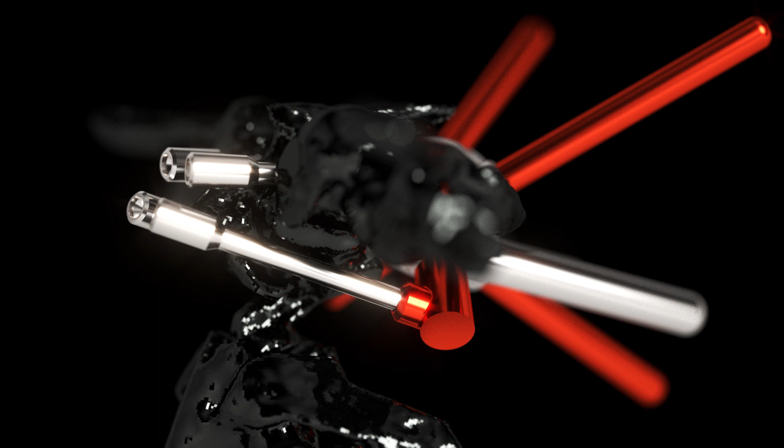Welcome to video number 4 of our GUNPLA series, where I'm going to continue doing this hard surface model for my robot. So in the last video, we created this backpack with a bunch of boosters.

The thing is that right now it's completely disconnected from the robot itself, as you can see, I can just freely move it away. And I need some sort of mechanism on how to actually connect this backpack to the robot here. I'm thinking about how to do it.

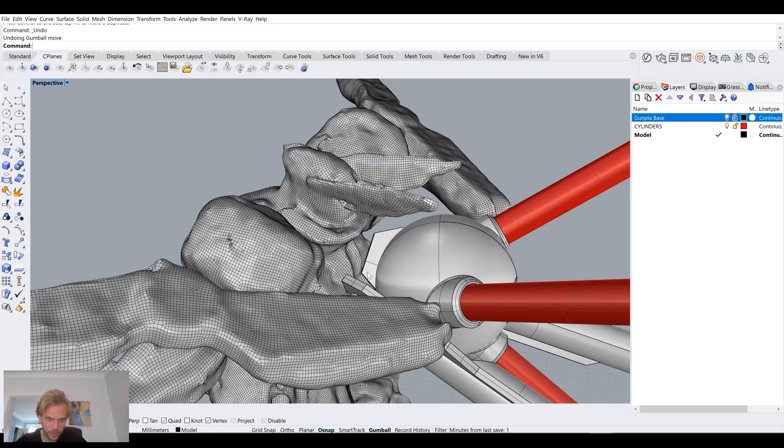One way would be to create these kind of straps of plastic that would wrap around here and then go back and here as well. So these two clips of plastic, but that really relies on tolerances being tight, and as you can see here, the tolerances are not tight, and also it's a little bit conventional.

So I'm thinking of continuing on with this kind of tube aesthetic and creating these sticking out tubes, like 4 spikes that are sticking out, 2 in the top part and 2 here in the back part, and then somehow figuring out how to connect it all. We'll see. But for now, let me hide the robot.

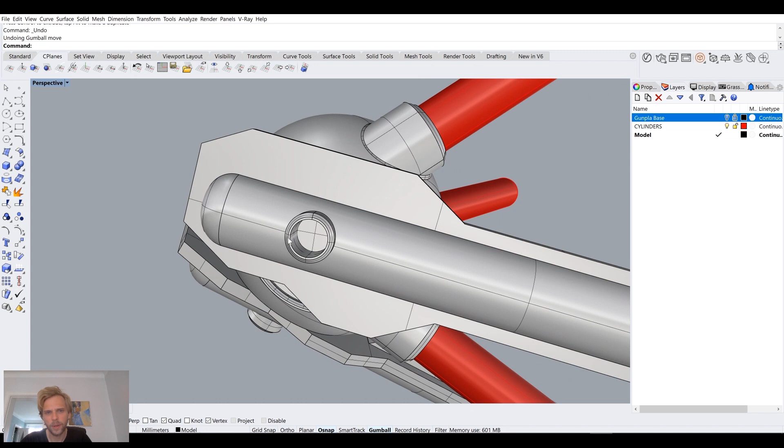For now, I want to fix this, because I don't like how this portion looks like. Everything else here, I thought about it, and it seems to be kind of okay, except this tube here. So to fix it, I will just simply duplicate edge.

I'll duplicate this edge, and I'll go for extrude. I will extrude curve, and I'll just extrude this edge until here. And then so now I have basically just a cylinder there.

I kind of want to keep this portion, this one I like, so I'll extract surface, and I'll just extract this ring here, which means that this whole part gets disconnected from the initial poly surface, so I can just join them up.

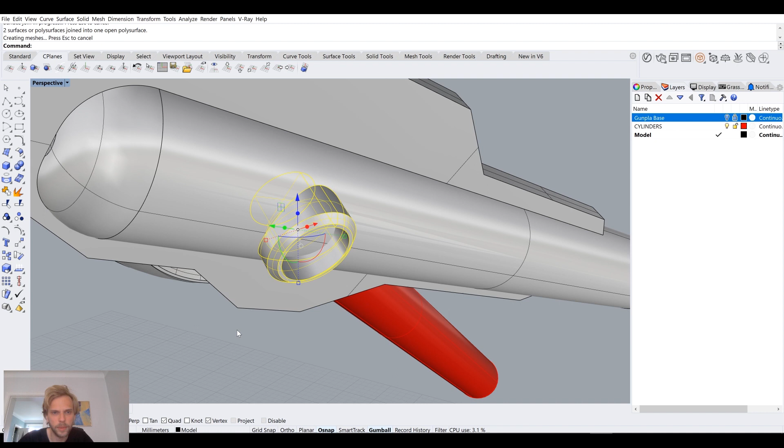Let me hide this for a bit. I also want that part right there, so I'll use extract surface, extract that one, which means that all of these, 1, 2, 3, 4 other surfaces get disconnected from the initial poly surface, and I just join them up into one polysurface.

So now I have this shape that I don't really need. I have this one, and I have this one, okay that's good. I will also extract surface, and I will just extract these two guys here. So now let's get rid of this, I just select it and delete it, and as you can see, some parts were left here.

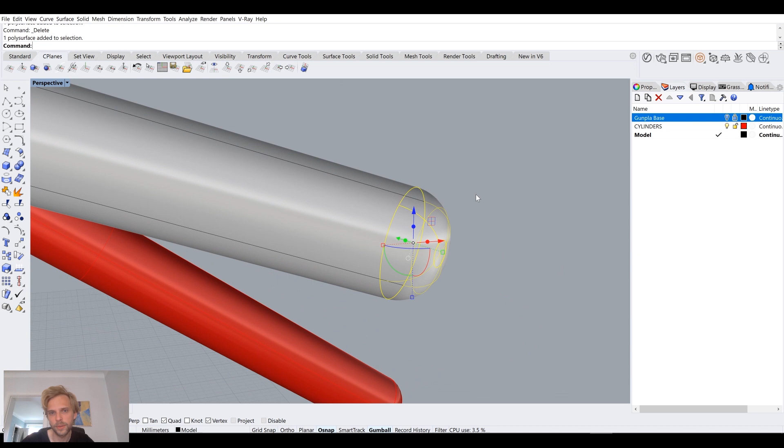So now, the first thing that I want to do is I want to mirror this to the other side, to here, I think. Or should we cut it instead? Yeah, maybe we can cut it rather than mirror it. We'll see. So for now, I'm just going to leave it as it is.

I'm just going to join it, without joining this or this, without joining these two, I'm just joining this one, and we'll just cap to close it off. So now, if I show selected, and actually let me get rid of these tubes here.

Oh, those are in the same layer, super. You can see there is an intersection going on because we need this portion to be flush cut. We need it to be cut flush.

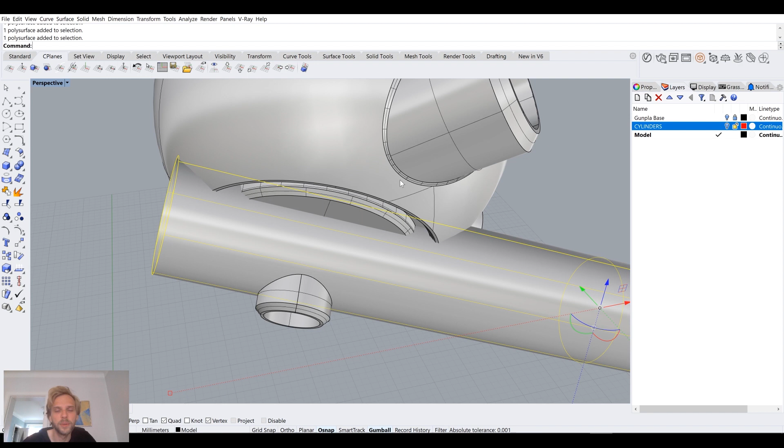And to do that, I already have a curve here, like that. So what I'm going to do is, holding down the Shift key with the gumball, I'll increase the size of the curve to something like this, maybe smaller, something like that. So when you hold down the Shift key, it scales everything up automatically. So we have it like that, maybe even smaller.

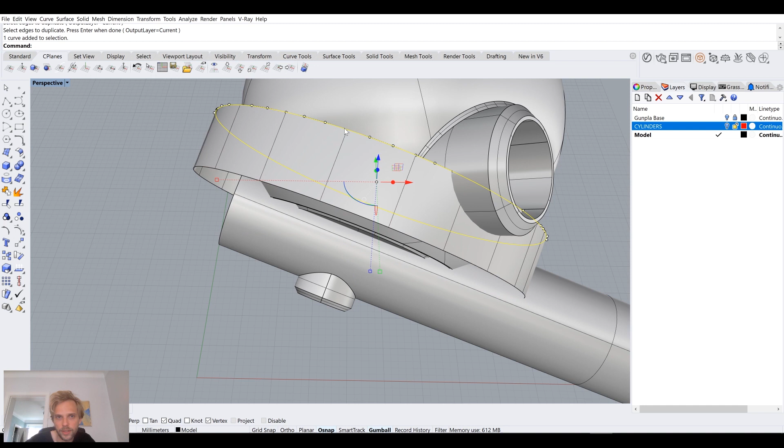Yeah, looks about right. And I will extrude this curve so that it extrudes perpendicular, in a perpendicular direction, like so. And maybe we will want this to be at a cool angle, so I will just duplicate edge to get the closer ring here. We had this edge as an original, and now I've just extruded and duplicated edge to get this curve right here. So let me delete the ring.

And if I were to increase, holding down the Shift key again, the size of this guy here, and then loft them, like that, then select the ring and cap it, we will have a cutter that should work quite well. Let's try. So I will select this guy, Boolean difference with this one.

Looks about right. Okay, good. So we have that going on. Let me hide the sphere for a bit. And let's see how we can connect these back to the shape, because right now they're disconnected. So this one is going to be easy. I'll just use trim and just trim away the

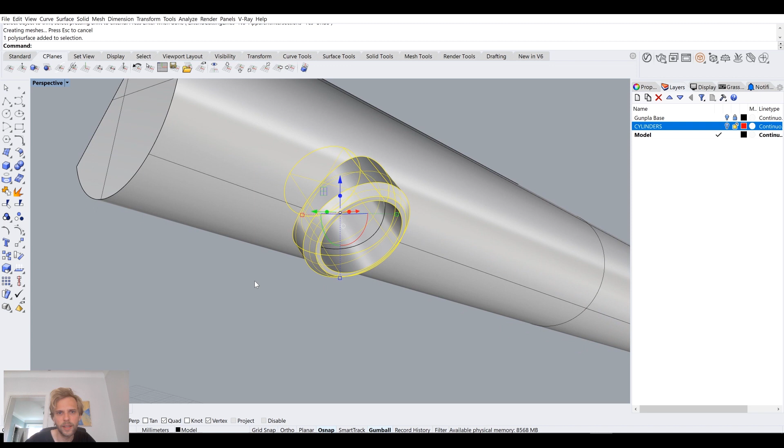We need to use the shaded tool. No. Okay, so I will not do the trim. Instead, let me hide it again. Let's go back to shaded view. I will duplicate edge, like that. For now, I'll just hide it for a bit. And I'll use this edge to trim.

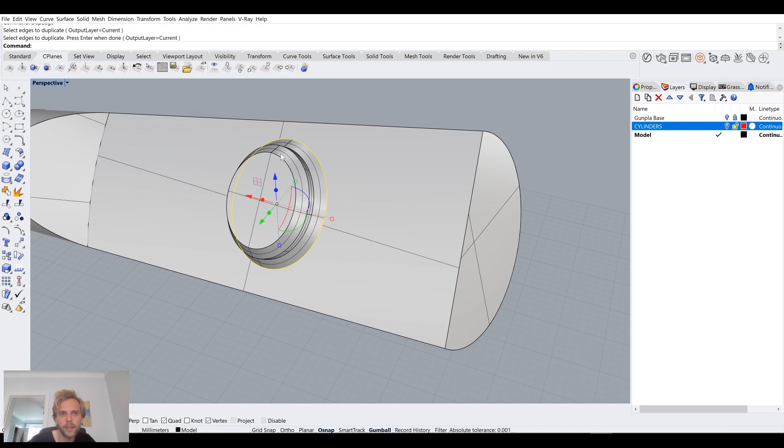Now this should be fine. Like that. And I believe I will do the same thing with this one. I could use Boolean difference, but might as well do the same method. So duplicate edge, hide this one, select the edge, trim. By the way, when Boolean operations don't work, you can always try this method, and not sometimes, most of the time it works much better.

Okay, so now I have this shape here and these two shapes, and I believe if I join them and type in what, valid surface, closed, super, it's a closed solid polysurface, so that's what we want. Okay, so I just cleaned it up a little bit, nothing too fancy, just wanted to have it going in a nice way.

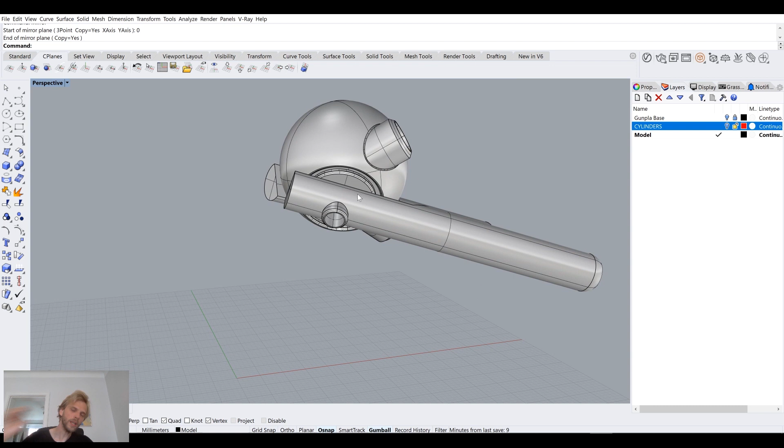Let's show, and I will just mirror it to the other side to see how it looks. Yeah, a bit better. Those fins I wasn't a fan of, and now we can see these rings here. It's nicer. Okay, so we have that going on. Now, what do we do? Now I believe it's time to, well, not connect it, but create some sort of bracing system for this model.

So shall we work with lines? Yeah, let's work with lines. So I will create a straight line. Should we do it in top view? Yeah, perhaps let's do it in top view. Shaded. I will create a straight line like that. The length of it doesn't matter. And I will create a new layer, call it helper and make it blue. There we go. Change object layer, and also I'll make helper the active layer.

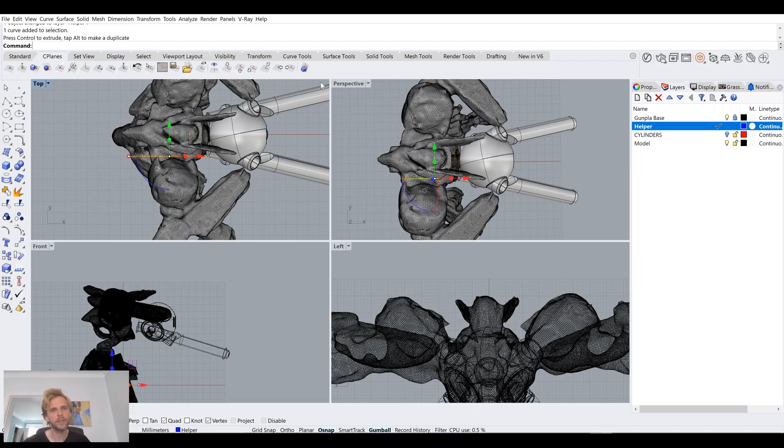Okay, so we have that line going on here, and basically I want the bracing to go above the collarbone, and below the, not the armpits, but how are these called? The rib cage, below here, right? So first I will do the one with the collarbone, the top one.

So in the top view, let's see. Well, it needs to be definitely rotated. A little bit like that, I believe. Seems to be good. And then in front view, I have no idea what kind of angle this is. So hard to tell. So let's do it in perspective instead. Yeah, definitely.

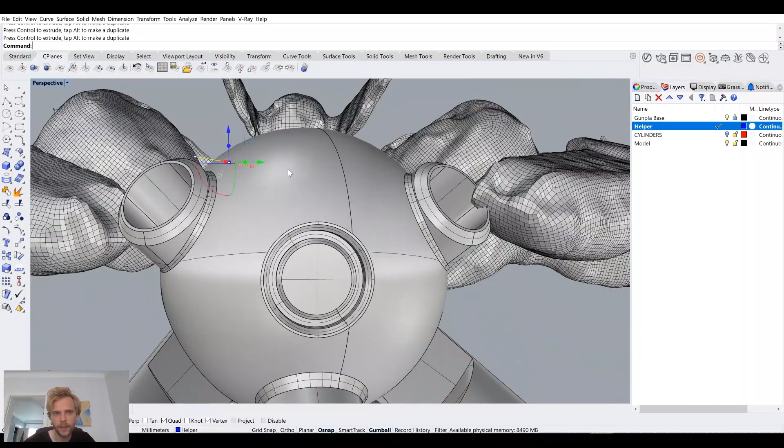Or maybe, sorry, I'm blabbing a bit. I'm just trying to figure out the angle of the line. Maybe just something slightly like that. That should work, right? Okay. Then I will push it in. And this is looking straight at the line. This is the angle that we get. Maybe it can go a bit more like so. Yeah, that seems okay. Okay, so we have one line done.

And I will just increase its size, holding down the Shift key again and dragging on the gumball to have an idea of what's going on. And now for the next one, holding down the Alt key, copy it down, just like that. And now find a good position for it.

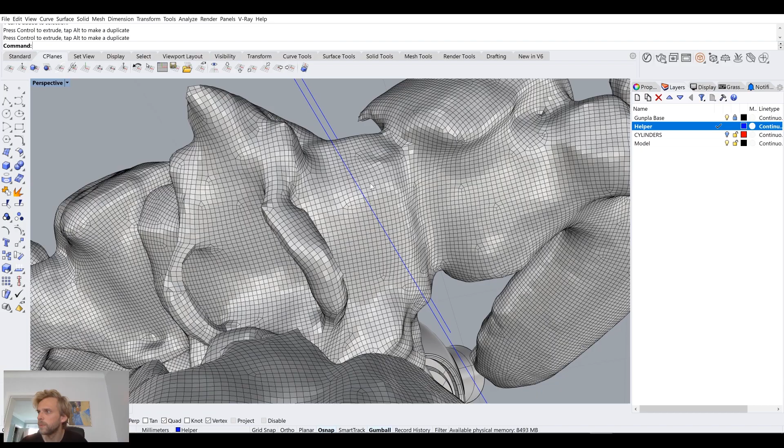So looking at the actual model, this is a single surface, which means we can follow it. Let's go to top view. I'll probably do something like this in the top view, just slightly rotating it. And now this will need to rotate quite a bit. Can we actually see it? Oh yeah, we can. So I want these directions to follow, and they seem to. So that's good.

Not really happy about this angle here. Perhaps we should keep it horizontal. Let's see. No, actually, yeah, that's fine. Yeah, that seems to be okay.

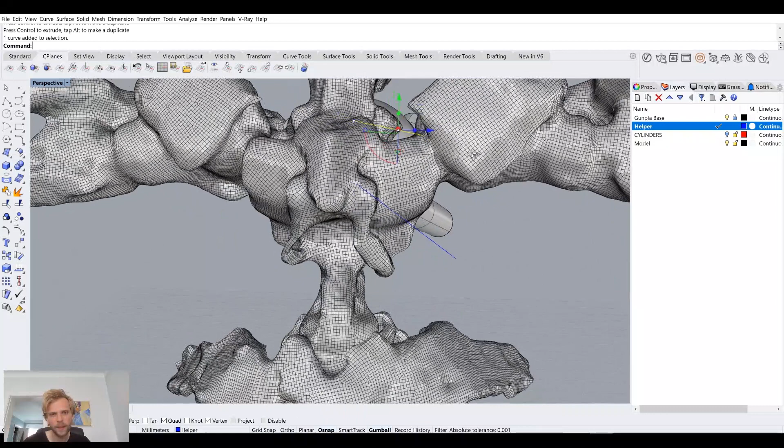Okay, and can this one move a little bit out and a little bit higher? Super. Okay, so we have these two guidelines here, and I will not be working further with them, and I will just scale them up individually to be longer, so that we don't need to deal with it if there's not enough length in the future.

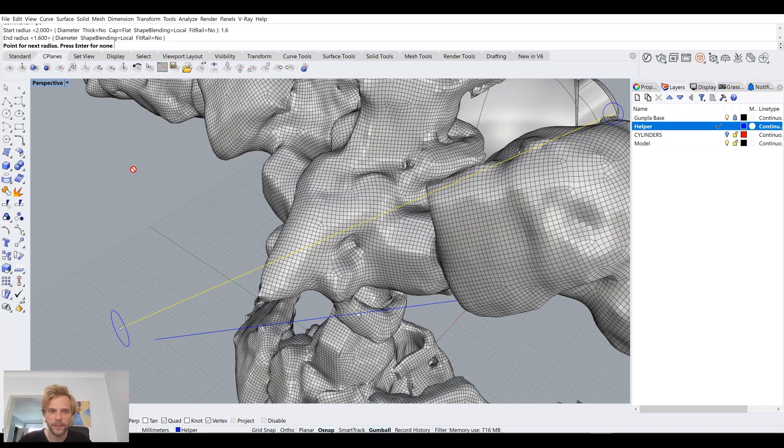And I'll just use pipe on them, and we need to decide what kind of thickness we use. I believe like 2 millimeter radius should be okay, like 4 millimeter diameter. It's a little bit intersecty. Let's try 1.6. Yeah, 1.6 seems to do the trick, so I'll do the same thing here.

So it's actually not 1.6, it's 3.2, because the diameter is 3.2, and if I were to measure the thicknesses of the plates here, that's 1.6. Let's see, 1.5, 3.2. It's a little bit thin, but I think we can manage. Okay, so 3.2 is here.

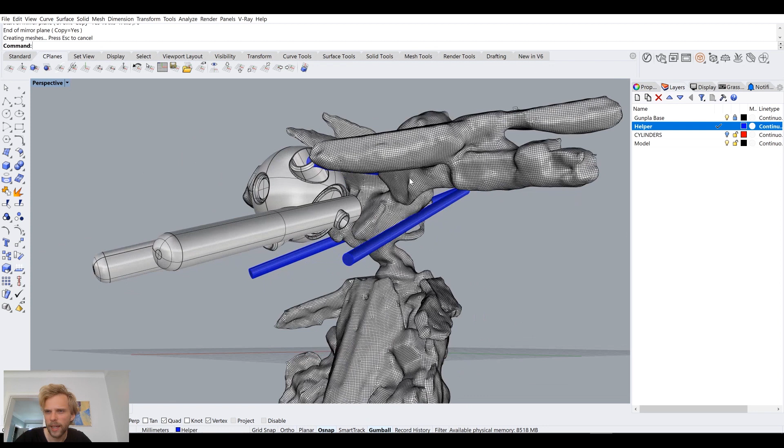Let me quickly mirror it to the other side just to see how it all looks. Doesn't seem too bad. We will be fixing all of the intersecting issues and so on. And now I will lock these blue ones together with the robot, and I will select everything else, and I will position it just slightly lower.

I just want to position it so that these guys fit better, because here I can see there's going to be some intersections and so on, and this is the last time when I actually work with the composition of it. So this can stick out and do that, and this one. Actually, this is pretty good. Yeah, okay. I just slightly moved it down, but nothing else.

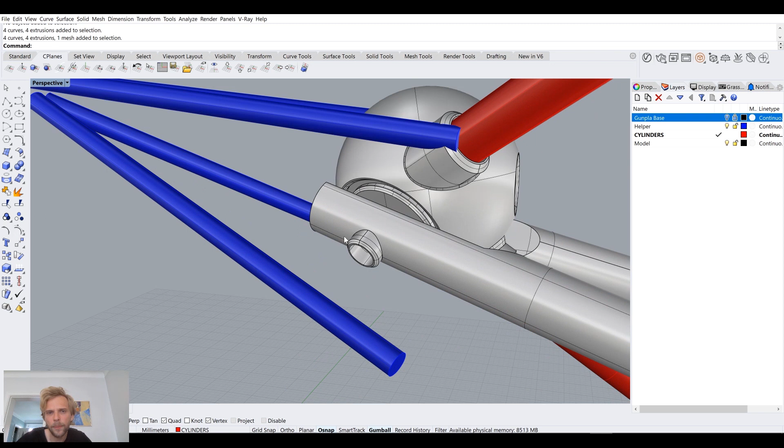All right, so we have these pipes here going on. That's super. And we have the robot. Let me actually hide it for now. And now we need to connect these pipes with the shape here. So actually we already have a connection area here, which we can use. That's superb. And we will need to figure something out here. I don't know. We'll do something with it. Yeah, we'll figure it out. Okay. So for now, let's solve the bottom one.

So for this one, I believe we can duplicate edge. We can get this circle in the base of the hole, and I will offset it inwards by 0.1, so that it can fit. And I will extrude curve, and this is 4 millimeters, I will extrude it slightly out, so let's say 5.5 millimeters.

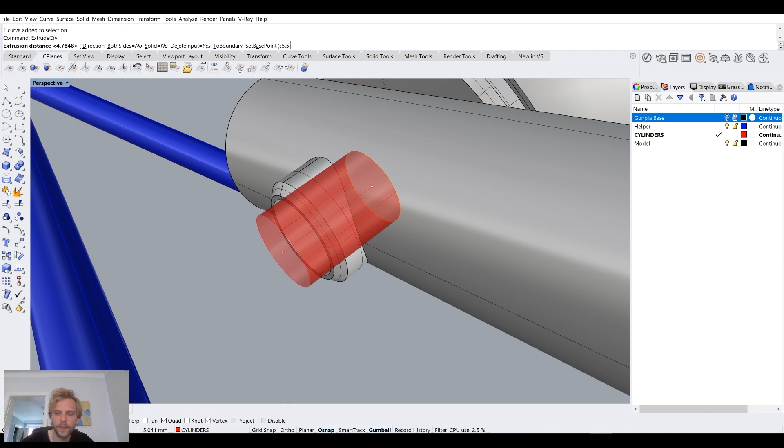Something like that. And then I will duplicate edge, get this edge, offset, and how thick do we want this boy to be? Let's say 3 extra millimeters here. Should it be thicker? Nah, I think that's fine. Between these two curves, the inner one and the outer one, I'll create a planar surface. And for this curve, I will just extrude it. Extrude curve.

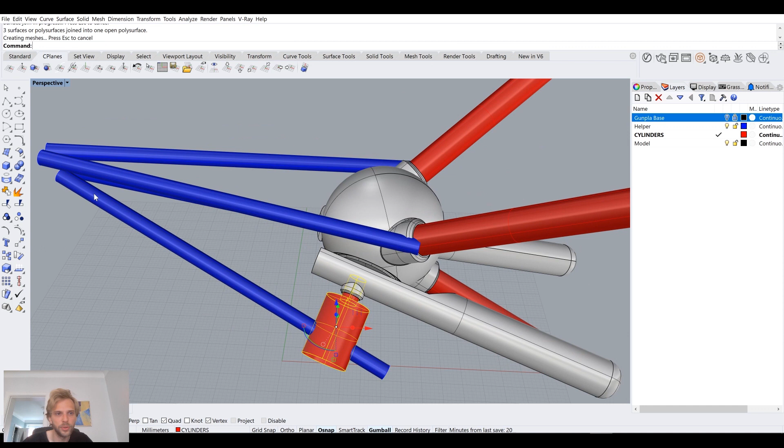And extrude it, let's say 13, I don't know, 13 millimeters. Something like that. Okay, so now we have an intersection going on, which we will need to fix. But at least now we have some form of geometry that can hold this new pipe that we've done. I will just cap it like so.

Okay, so now let's think about this. This tube needs to go in. Okay, I will use extract surface on this base surface here. Or actually, can I not do that? Duplicate edge rather. Yeah, I will use duplicate edge here. And then let me offset the edge outwards by 1.6 millimeters.

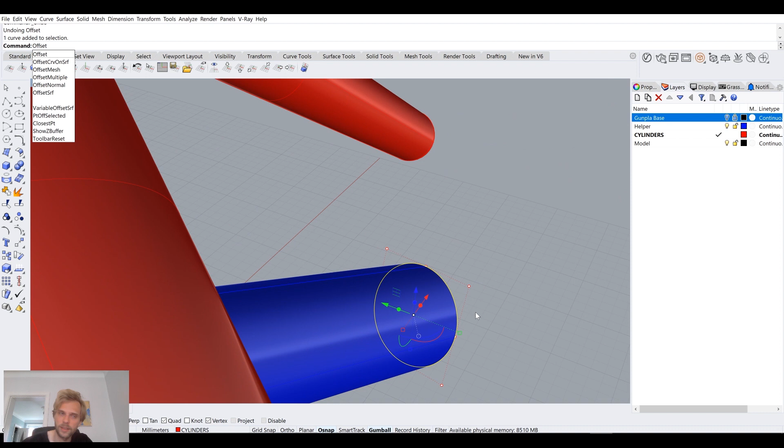Is that really 1.6? Holy crap, that's thick. Distance. Yeah, that's 1.6. Okay, let's try offset, rather just offset 1.2. Yeah, we can deal with 1.2. Okay, so we have this guy going on here.

And let's move everything to somewhat of a correct position. So I'll take these two curves and move them. Let me turn off center snapping for a bit. So I'll move them from here to somewhere. Right now I'm just visually kind of checking it out. Somewhere here maybe. Something like that.

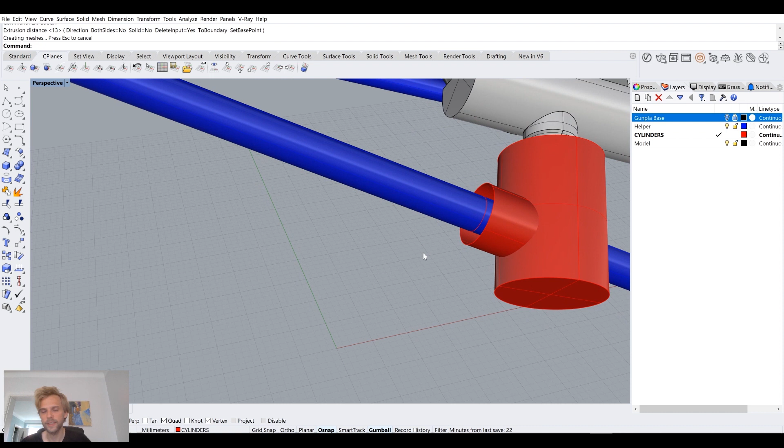That should be fine. And basically this guy is going to be extruded. Extrude SRF, no, sorry, extrude CRV, extrude curve, and this is just going to be an intersection here, like that. So that's easy, and let me cap it, and actually already use Boolean union to kind of join it in. And then this inner curve is going to be used as a hole for this tube. So let's see how we can fix it.

Let me turn off the tubes, and I have this inner hole here, or rather inner circle here. First of all, I need it a little bit wider because it can't be the same width as the tube, because it will not fit because of how 3D printers work. So I will just offset surface, or offset curve. I'll just offset this circle outwards by 0.1, or let's have a snug fit, so 0.05 millimeters.

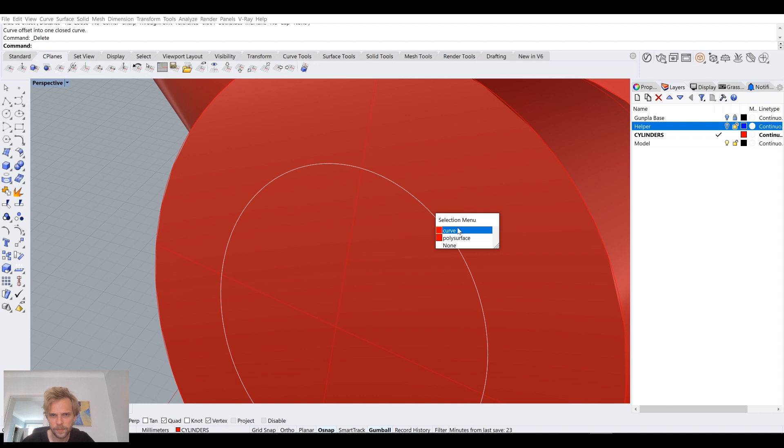Like that, and just extrude CRV and extrude it inwards. I think something like 7.5. Let's do 10. No, 10 is also bad. Let's do 8. Sure. 8 millimeters should be good enough for a fit. And then I'll just cap it. So now I can take my original cylinder and Boolean difference out this inner cylinder here to make a hole. Let me clean everything up a bit. So I'll SelCrv, select curves, and I'll just hit delete to make sure that there are no curves here.

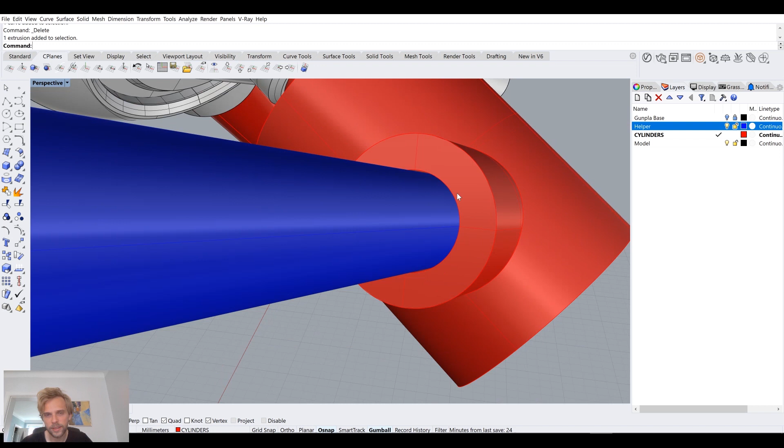Okay, so we have this going on, and I have my helper here. Oh yeah, and of course, this cylinder needs some trimming. Let me turn on wireframe. The only place where the blue cylinder is hitting the red cylinder here is at the back of the hole and also here. So I can do Boolean difference, subtract from this guy, enter, subtract with, and I'll choose delete input to be no. I'll subtract with this cylinder here.

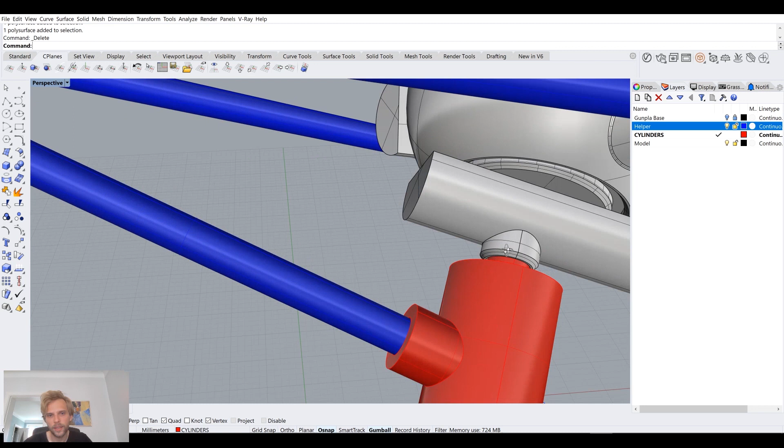And you can see now this blue cylinder got disconnected into two parts, one that fits perfectly inside of the hole and the other is the unnecessary end of it. Okay, so we have this going on. That's great. I'll just quickly do some chamfering, but nothing too much. So for this to fit better, I will chamfer edge. Oh, that's a 1 millimeter chamfer. I'll chamfer edge by 0.3 millimeters here so that it's easier to fit in the cylinder. And actually, let me do it like so, 0.3 there.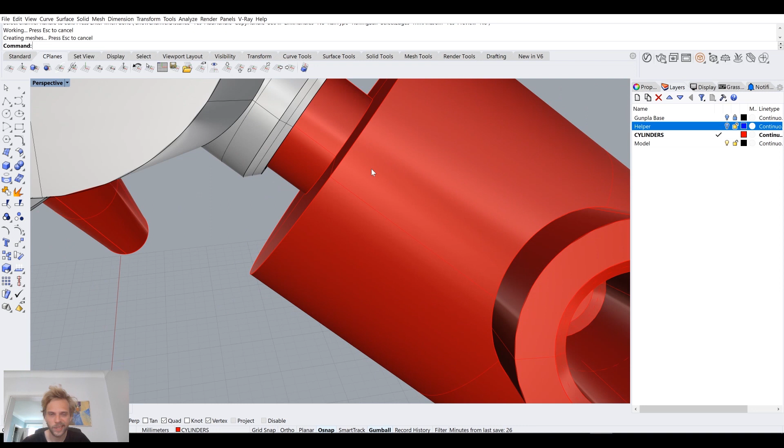But if I chamfer that part, that means that I definitely need to chamfer the edge of the cylinder as well. So we will do that right now. Chamfer edge, so that everything fits perfectly. So now it's chamfered. Okay, good. Back to here. What else? I believe this is a bit meh. So I will chamfer edge, and I'll actually chamfer with 1 millimeter here to have something like this going on. Should this be...

Maybe we can use fillet edge on this one. So fillet edge, rather than making a straight chamfer, is going to round off the connection. So fillet edge, radius 1 millimeter, sure. Let's see how it works with this. Let me put an EMAP on it just to see better. Yeah, that's not bad. Yeah, that's fine. Okay, EMAP close. Okay, so we have that going on, and what else?

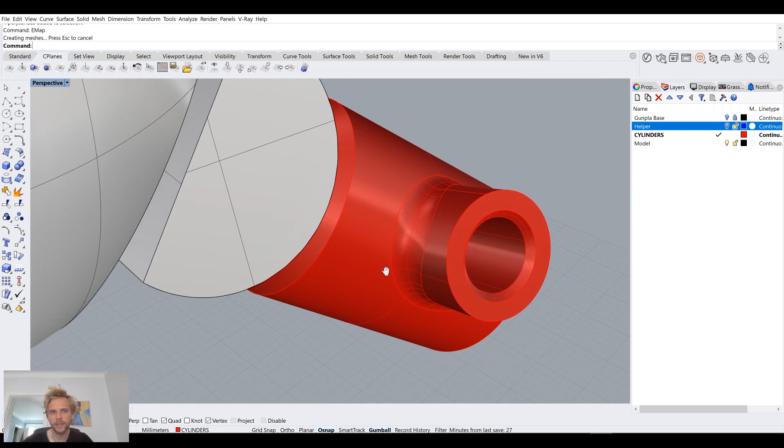I will deal with this part later. We'll make it pretty. Maybe we need to fix this. Okay, so chamfer edge. Let's go for 0.5, like half a millimeter for this one. Looks okay. And this one as well. Yeah, okay. So we'll have it like that. And this one travels to our model layer because it's kind of finished. We don't need that part, and we can just delete that.

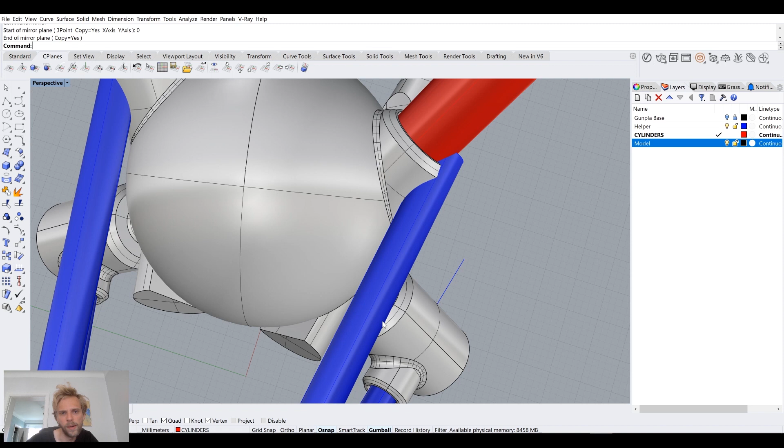We can just take these two guys and the curve and just mirror them around the 0 point, holding down the shift key, to the other side, just like that. Okay, so we have the bottom part done. Now it's time for the top part. And for the top part, let's think about this. Should we still do a cylinder, or can it be like a sphere? A sphere would look weird, right? Yeah, let's just do a cylinder.

Okay, so let me delete that. Don't want that. And let me actually hide that. I only care about the curve now. First of all, I will select a point here. Is there like a tangent snap? No, there's not, of course not. So that will not work, but can we create a point in the middle of this sphere? So if I turn on center, yeah, super, it snaps right to the center. If I hide the sphere now, there's the midpoint.

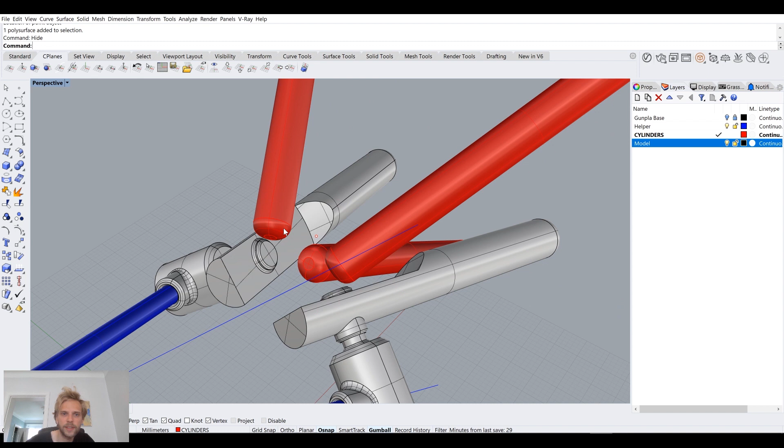Which means I can start drawing, or rather, how do we do this? Show selected, sphere, let's go for wireframe view, start drawing from the midpoint, shade it, and just snap to somewhere on this, whatchamacallit, on this line. And for that, I will perhaps work in the top view so that the directions kind of align between these cylinders. Or maybe we want them to be like that? Nah, maybe we want them to be like that though.

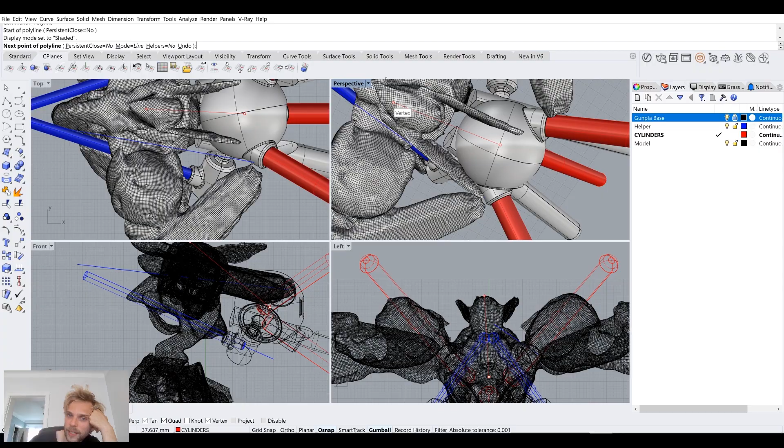How is the model looking? So the head might be in the way. Let's see, not the head, but those bunny ears might be in the way. No, they won't, which means I can snap to somewhere here.

Okay, let's do it. So I just snap to that point right there. Let me turn off the robot for a bit. That's the curve that I have, and I can actually split it with the sphere here, so that now I have two curves. I will delete the inner one, and I have this small curve here that I can now scale up, holding down the Shift key, like this.

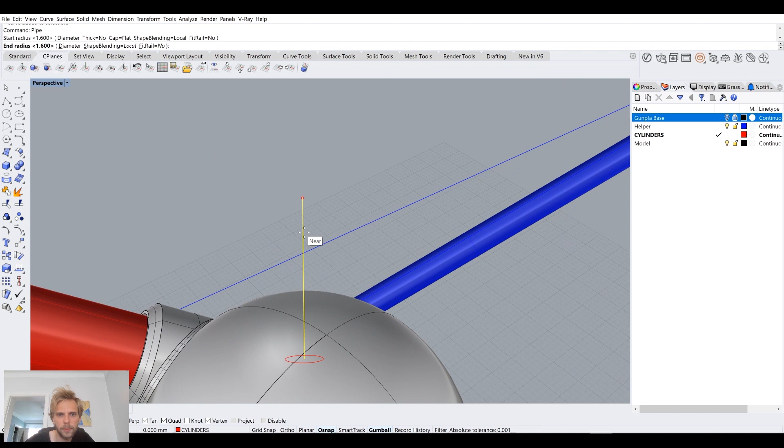Do we scale it up more? We'll see. But I will definitely pipe it. Pipe. Ooh, much thicker. Pipe 3.2 millimeters. That's a bit better, but we can go even thicker. Pipe 4 millimeters. Yeah, that's good. Kind of good.

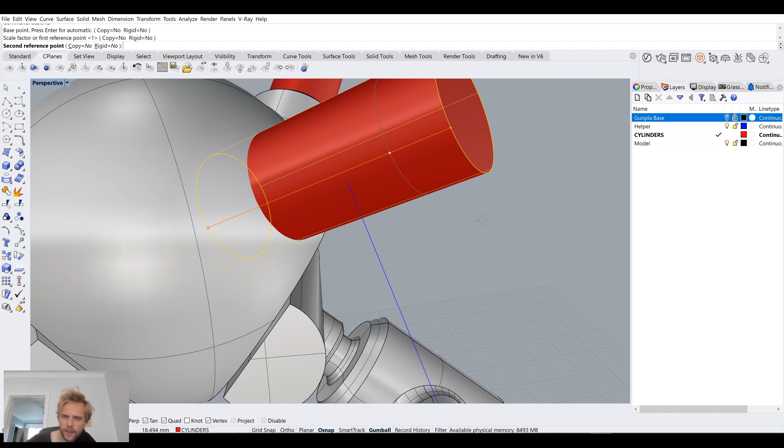But I want this to be a little bit out more. So I will scale 1D and scale from this point to this point. I will scale it out, maybe something like so. The reason why I'm scaling it is not because of something functional. I'm just looking at the composition and how balanced the composition is. So this seems okay.

Well, actually let me cut away the unnecessary part here. So Boolean difference with this one, and select that one, hit delete. So now I have a perfectly fitting cylinder thingy. Okay. And now I kind of want to do the same thing as we did here. So where's our show selected? There's our chamfer here. Duplicate edge. We get that curve.

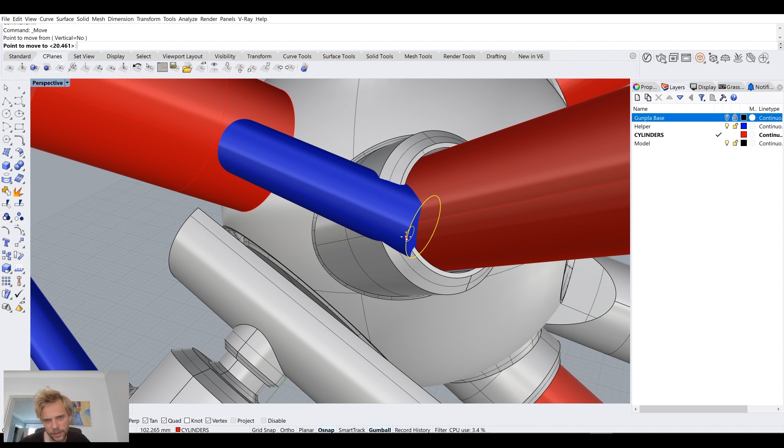Let's move that curve, from here to here. Oh, I messed up. Didn't move it in the correct direction. So, oops, move it again. There we go. Here. Okay, that's good. Oh, that's a little bit too far. So I will move it back. From here to maybe something like this. Yeah, this should be okay. So we have this curve.

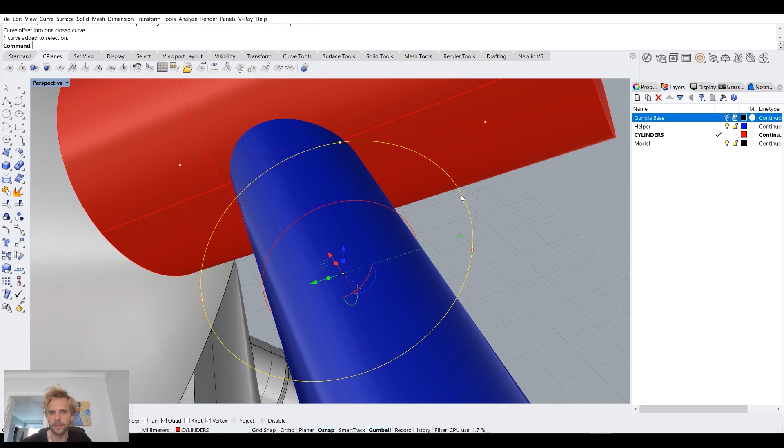So first thing is we offset this curve out by 0.05 millimeters, right? That's going to be the hole. And the next one, we offset it again by 1.2 millimeters. That's going to be the receiving cylinder itself. I'll extrude the curve and I'll just choose solid yes, make sure that it intersects with the initial cylinder, use not Boolean difference, Boolean union on both of them. So now they're one closed polysurface.

Take the small one, extrude curve. I used 8 millimeters, so I'll use it again. That's the wrong direction, so I'll make sure that the extrusion direction is correct. Click to accept, and now just Boolean difference, Boolean out this cylinder here. So now we have an opening in which our tube fits. Well, not really, because it still needs to be trimmed, so I will do Boolean difference on it with this one, and get rid of the leftover cylinder in the back of the form.

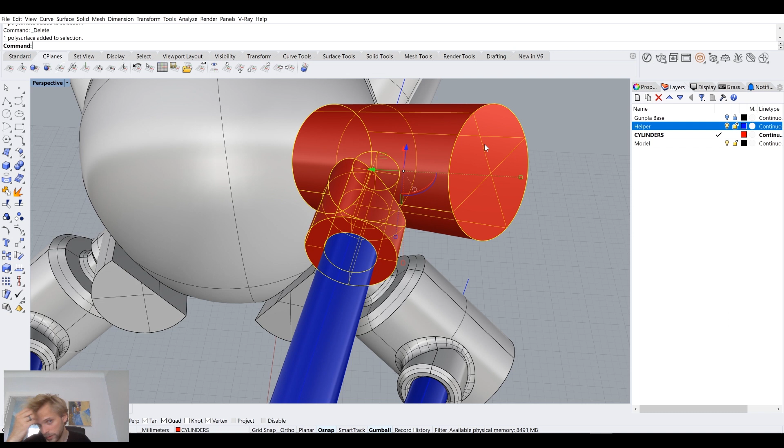Okay, so now we need to work with this one. I will select it and isolate. Now let's see. So first things first, fillet edge. We want this to be consistent with the bottom one, so radius 1 millimeter. Oh, there are two edges here, this one and this one. Ooh, and it breaks. Shit. Or wait, maybe it won't. Rebuild. No. Crap. Extract or explode. Explode. Join. Wireframe. Shaded. Nah. Extract surface. So this surface just broke.

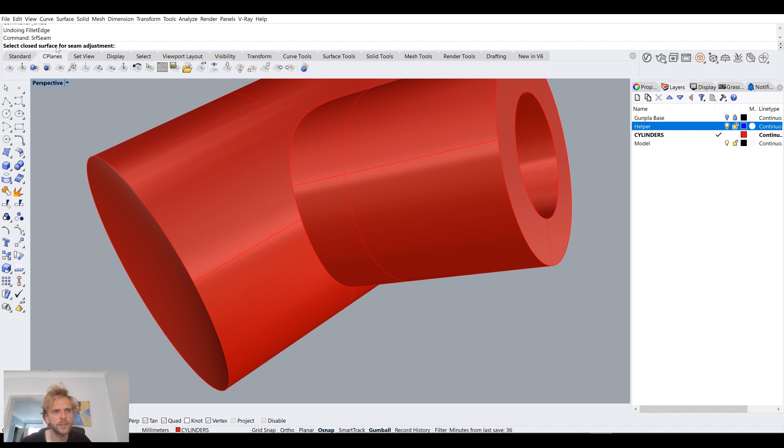Oh, I forgot to select this edge here to fillet. So that's my bad. Actually, can we align seam or is it just seam? Surface seam. Select the surface for seam adjustment. Okay, I can't because this is a trimmed polysurface, so it doesn't matter. Fillet the edge. So I missed this guy, so that's why it broke. Now it should be fine.

Yes, it is. And then chamfer edge 0.5. That means it's the outer one here. And then chamfer edge again with 0.3 for the inner ones. Like that. Looks good. Show selected. Let's see the cylinder thingy. Isolate it. Chamfer edge. And fix that edge there so that it fits perfectly. Show selected again. This one. Clipping plane just to double check.

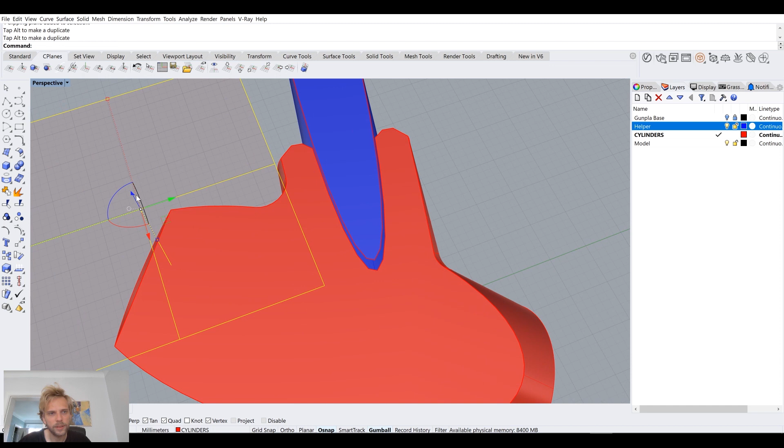Where are we? There we go. That's good. Yep. All of that seems to be fitting quite well. Actually, let's just see the whole thing. Are there any problematic areas? So everything here up until now is fitting nicely. I'll just move the clipping plane here. Fitting nicely, that's good. No intersections there. This just fits. Fits. And now, yeah, that's good, and that is also good.

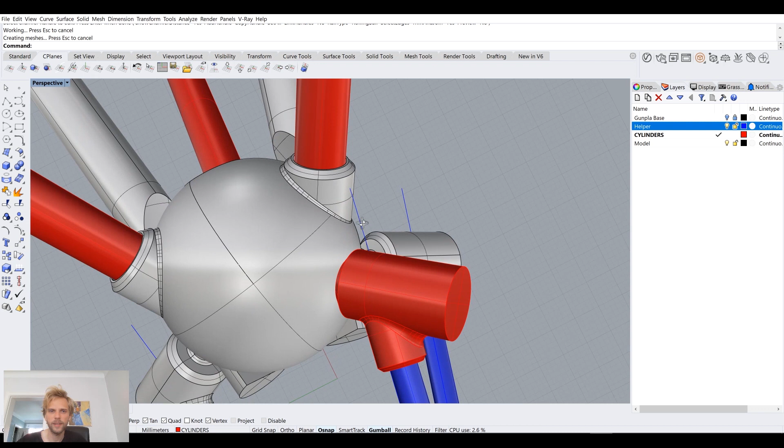Super. Okay. So we have this done as well. This is kind of a boring connection here. Can I chamfer edge? Can I use like 1 millimeter to chamfer this edge like that? 1 millimeter is too much. 0.5 instead.

Yeah, I mean, why not? Looks fine. So we'll do that. Can it connect though? Let's think. I'm just thinking. How does it treat the surface? Or rather, we will do that during the detailing phase.

That's fine as well. So we'll just select the curve, select this one, mirror, 0, mirror it to the other side, and we have something like this going on, which already is kind of cool. I enjoy it.

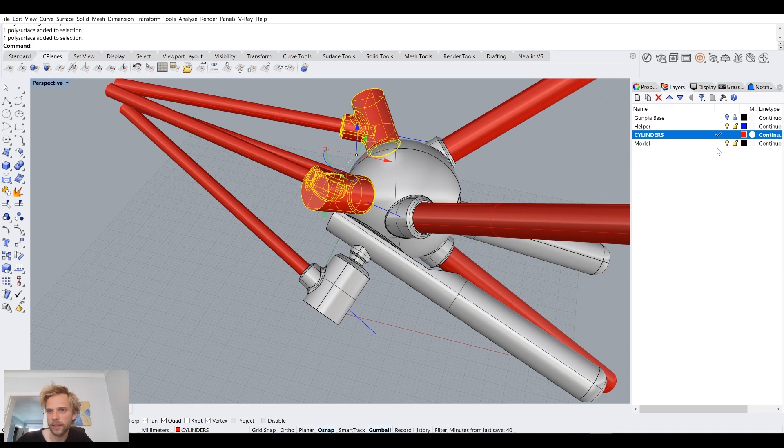So let me select these guys, and these are not helpers, or rather the curves are helpers, but these are cylinders, and these are part of the model. I will figure out if I want to Boolean union them to the model, or if I want to do something else with them later.

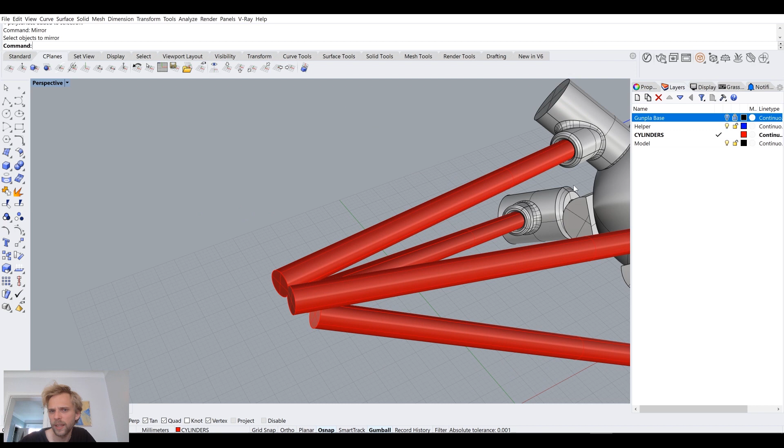So let's see how they fit. So basically this whole thing is just going to kind of be locked in place. It's going to be loose, it's going to be wobbly, but I think that's fine. I do want to fix this portion here. I don't really like how it looks. So let me get rid of that. Like this, and we will be fixing just half of it, of course.

And let's start with, actually we don't need a model, we just need these. Let's start with the length. So I will not scale. Instead I will use solid points on and just grab that single control point there and move it. Let me turn off quad snapping because it's getting in the way. Move it back until somewhere here, maybe even more. Something like that.

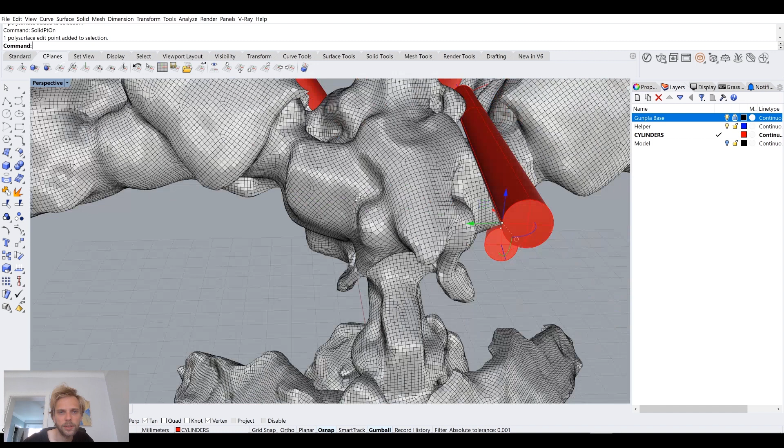Okay. And now, same thing for this guy. Solid points on. That control point there, move it back. Somewhere there. Yeah, that's a bit better. And now let's extract surface, extract these two, get rid of them, hitting delete key, duplicate, dupe border. Let's get the two curves here, and let's work with the bottom one first.

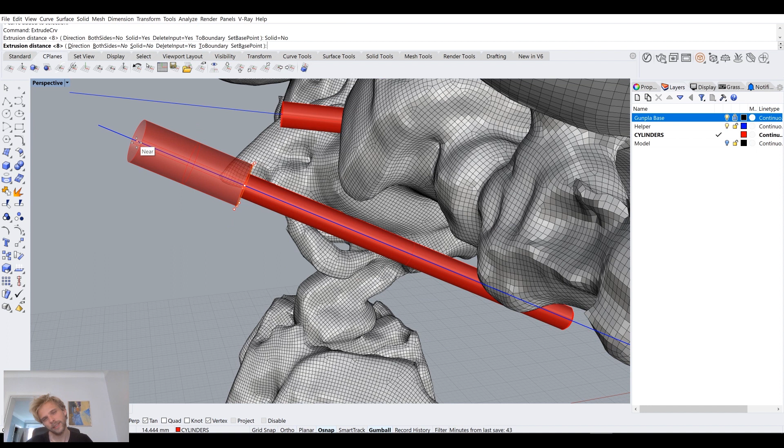So I will offset it by 1.2, I guess is fine. So let's offset it. I'm just thinking about what kind of aesthetics I want. Yeah, let's extrude it out, and solid no in this case. So this would look like that. That's kind of okay.

But what if we, instead of extruding, just select this curve here, make a copy of it, and copy it to here, like that, and take this curve here. Let me turn off the GUNPLA model. So we have three curves now, and I'll just take the large one and move it by like 1.6 millimeters here, something like that. And then I loft between these two,

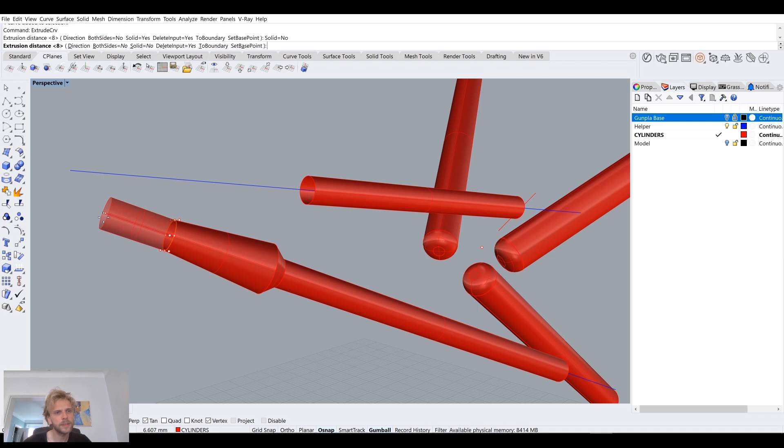loft between these two, extrude curve, solid no, and extrude it a bit here, so it looks like that. I don't like how it looks. It doesn't look good. What about like that? That's a bit better. If we round it off, that's okay, but I also don't really enjoy that.

Let me just extrude curve, do something like this. How far does it stretch out? That's a bit far. That is a bit far. But we can fix that, that's fine. So I will actually just select everything, join, cap, solid points on, select these three control points and move them back by like 3 millimeters or something like that.

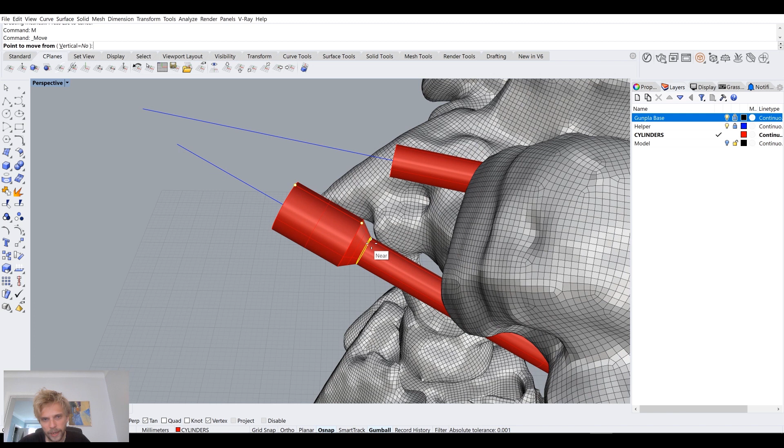Yeah, that's a bit better. I'm just wondering if it won't intersect. Just in case, I will move it back even more. 2 more millimeters or 3 more millimeters. Something like that. Okay. So we have this going on, and then I will repeat the same procedure for this curve here, or this pipe here.

So offset 1.2, move 1.2 or 1.6, it was 1.6, and extrude. I need to measure distance, how much it extrudes. We extruded 7.85, so extrude curve 7.855. Let's just loft between here and here.

Super. Join, cap, SelCrv, delete, SelPt, delete. Okay, we have this cleaned up. So now we need to make it nice. What if this gets filleted? Fillet edge, radius 0.5. Radius 1.

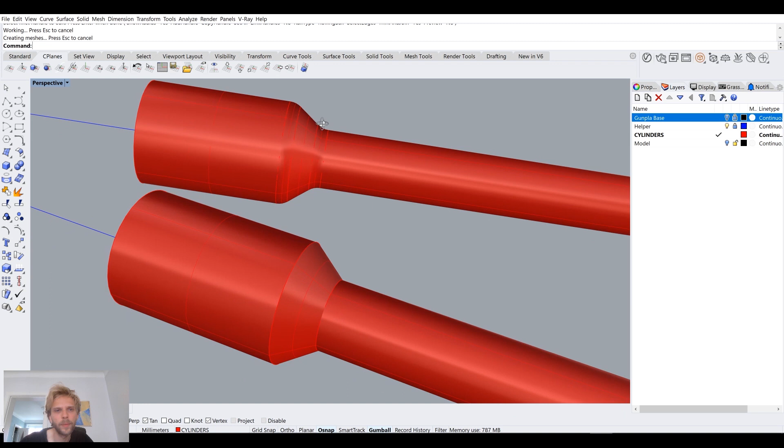I don't know. What about here? Yeah, this is fine. Okay, we can use that, but not 1, rather smaller, 0.5.

When it comes down to aesthetics, it's always this kind of work, just trying out different things and seeing what sticks and what doesn't. So I wanted this to be, I think we're getting closer for this being something like a cannon, so I will make it into a cannon.

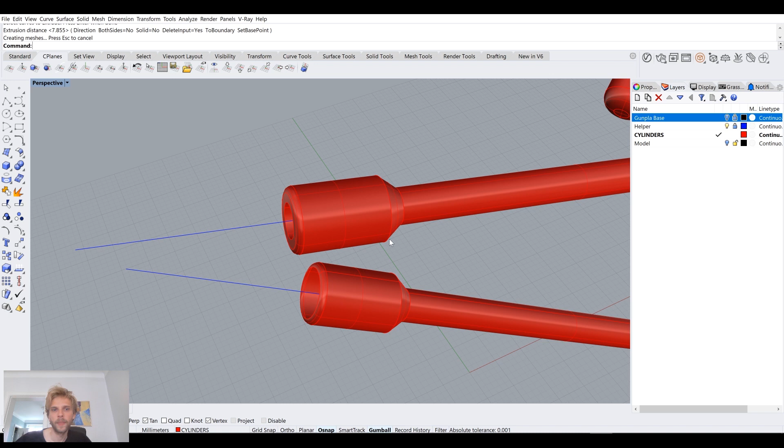0.8, something like that. Planar surface, extrude curve. This one goes in by 1.2 or 1.5. Cap, oh sorry, not cap, join, and then cap. There we go, let's see how it looks like with emap on.

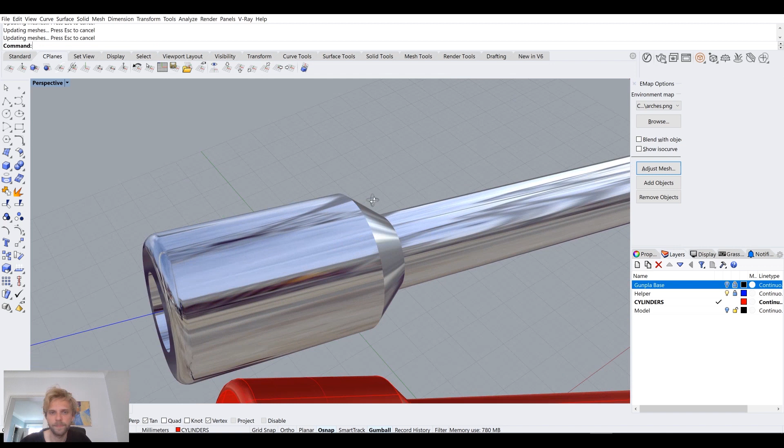And that's not bad. Why is it so jagged though? Minimum initial grid quads, let's try 100, preview. Still pretty bad. Simple controls, more polygons, preview. And that's better.

Okay, so we have this going on. I like it. Yeah, I like how this looks like. We will of course make it more interesting, but as a base form, this is fine. Do we have a curve there?

Yes, we do. We will offset it inwards. Planar surface, delete, extract or extrude curve inwards. Was it 1.5? I believe it was. Join everything, cap. There we go, we have this going on.

Time for some chamfers. Chamfer edge, 0.5. That's way too much. 0.3. That's better. Okay.

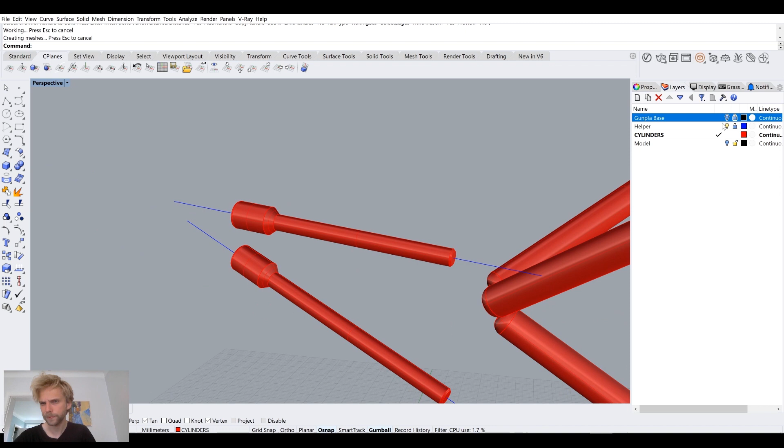So we have this. It might not even show up in the 3D print, but it's nice to know that we kind of have it, right? So we have that, and we have the model. I enjoy how this is starting to look like. That's looking good.

So let me select these two guys, mirror them to 0, like that. Okay, and let's do some cleaning up. So first things first, this guy here, isolate.

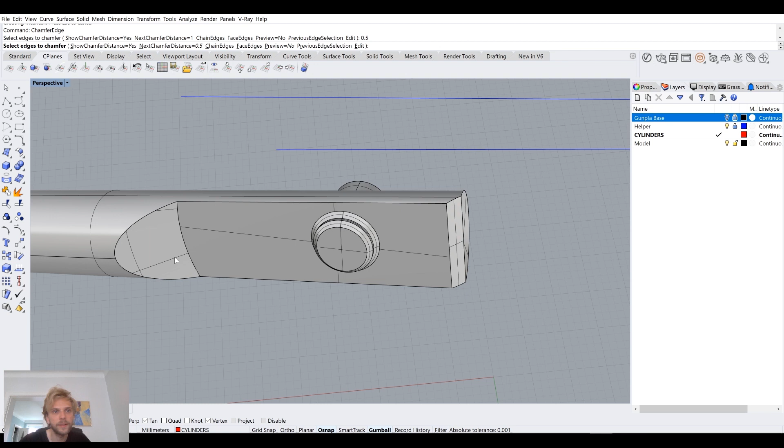I don't like this edge, this edge of the plate here, so I will chamfer it. Chamfer edge, and rather, should we chamfer this one first? Yeah, we should, and we will use like 1 millimeter for this chamfer here, so that it cuts away like that. And then we will do 0.5 millimeter chamfer edge on all of, oops, not that, but rather that.

So I have that going on. It breaks there, huh? Shit. Also breaks there. So that was with 0.5.

Okay, let's try 0.3. Still breaks. Do we need to really fillet this, or rather chamfer this?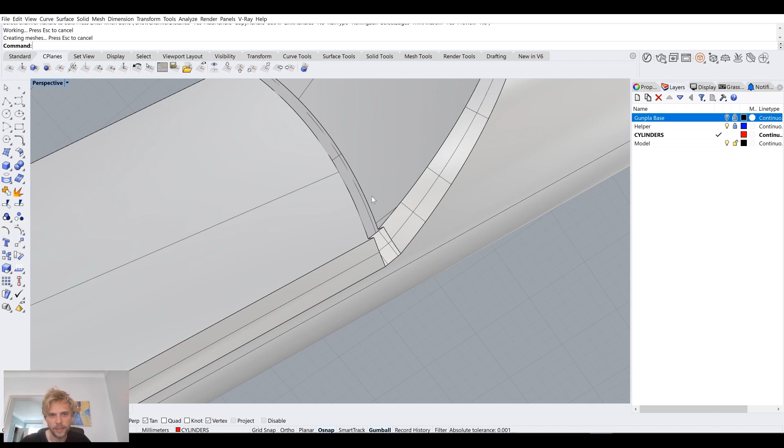Okay, 0.5 chamfer for this edge here, and then chamfer edge again, here, here, and here. Ah, crap, it does break. Well, it technically does it, but it does it poorly. Can we fillet edge though?

0.5 fillet on this edge. Yeah, fillet seems to be doing a better job. So let's see how it would work with this. That's not that bad. It's not great, but it's not that bad.

So when dealing with chamfers and fillets, this is usually like 90% of the work, just trying to figure out what the heck is not working.

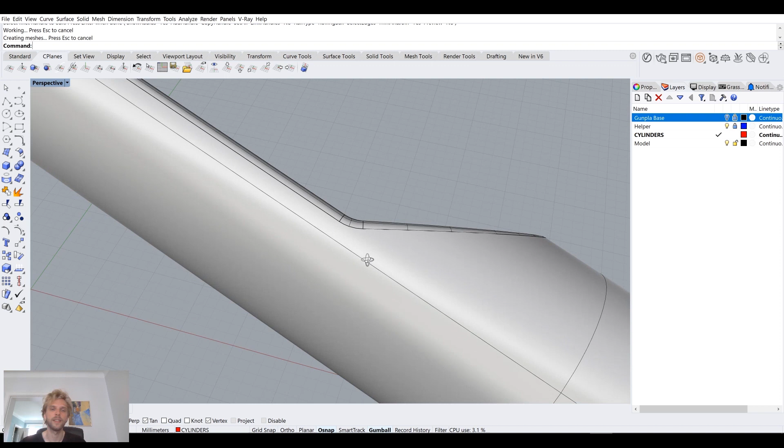So okay, fillet edge radius 0, or radius of 1 millimeter for this edge here. Okay, and then fillet edge radius of 0.3 millimeters for here. Oh, that's clean, that's good. Okay, so now I just softened that edge there to just make sure that the fillet works properly.

So usually when things don't work out, you need to pre-chamfer a sharp edge to make them kind of work. So now this seems to be okay.

Emap on. Yeah, that fillet is fine. That's good, that's good. That's not great, but acceptable. And that's okay as well.

Okay, so we have this portion done here. We don't really need to do anything here. Well, I do want to chamfer that edge, so we use 0.5.

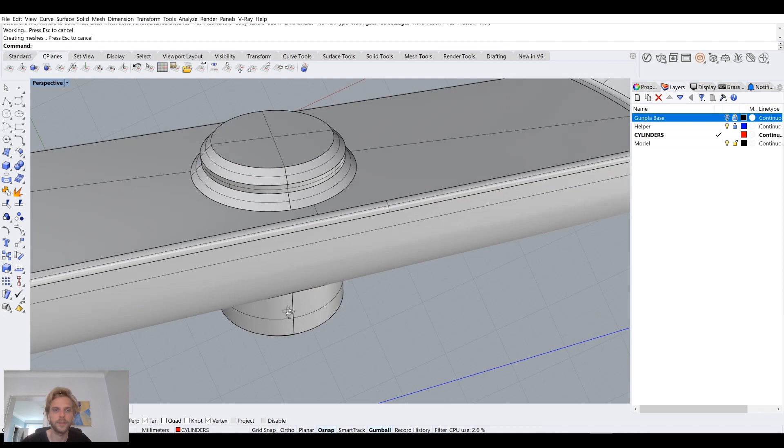And so just so that I don't forget, I will show selected, and I will show this guy, or rather isolate this guy, and also chamfer edge for this guy as well. And for that, we will need to delete these two. Okay, so we have that done.

What about this one? Well, we will definitely want to chamfer this edge here. That's a no-brainer, just so that it's not a very sharp corner. This one is okay. So now I'm just, I'm not detailing it. Don't think that I'm detailing this. I'm just cleaning it up.

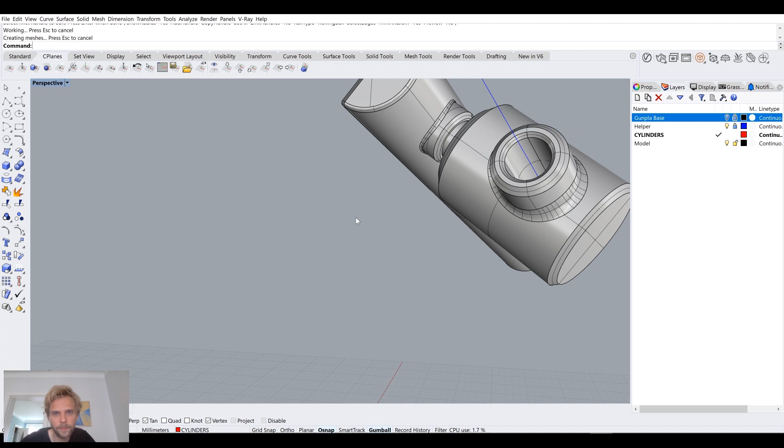Fillet edge, so I want to fillet this one. More. 0.5. Basically, you don't want to have any of these kind of very sharp edges when dealing with 3D printing.

So I'm going through all of the geometry one by one, making sure that every edge is either filleted or chamfered, and I don't have very sharp edges anywhere. So here everything is kind of okay except this edge here. So I will chamfer this guy. Now it's fine.

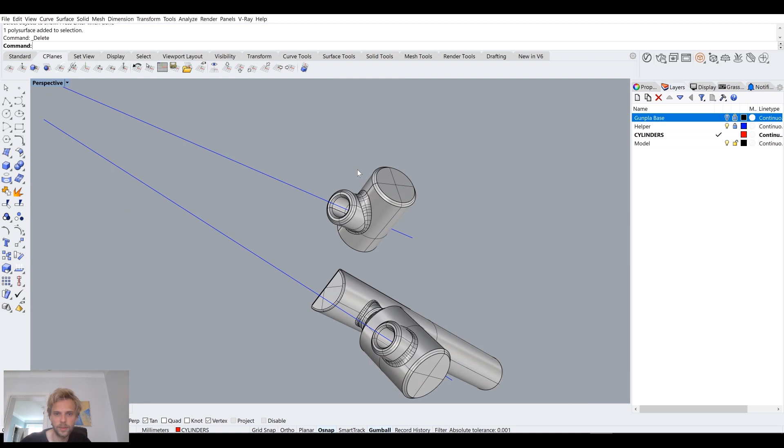That's good. Show selected. What else do we have here? All right, so this one needs to be gone. Then we have these guys here, and I believe I've fixed all of them, and this one is done, and this one is done.

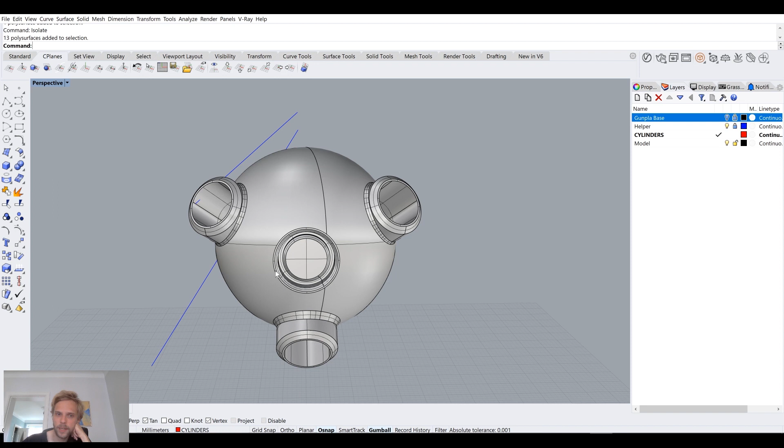So what I'm thinking of doing is cutting it in half right through the middle, and then somehow saving this eyeball here. So how do we do this?

First of all, I need to extract. Let's do extract surface. I will extract this, which means the sphere and the, I'll call this the eyeball, get disconnected like that. And I will actually move or copy this eyeball along the x-axis by 20, like that. Let me actually delete it. I should have moved it. Okay, so we have this going on.

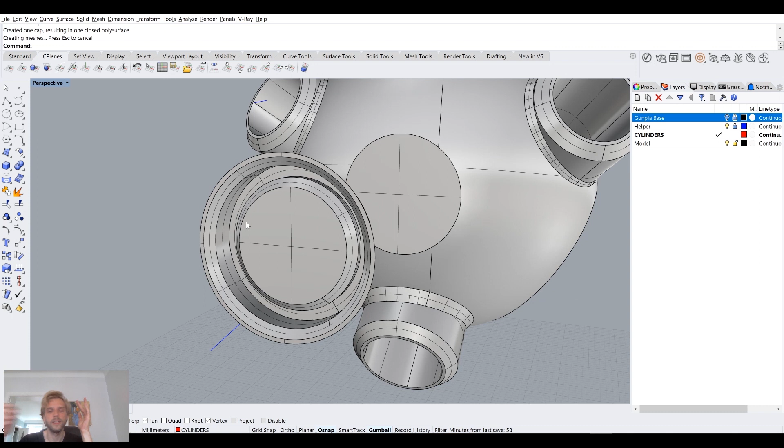Now I need to fill this in, and basically this eyeball guy here needs to be a separate geometry, right? So first of all, it doesn't have any thickness. I need to give it thickness.

I will extract, not extract, duplicate edge. I'll get that ring there, and extrude curve by 3.5 millimeters, like that. And I'll take that cylinder, and move it back by -20, or copy it back by -20, so I have a copy in the correct position.

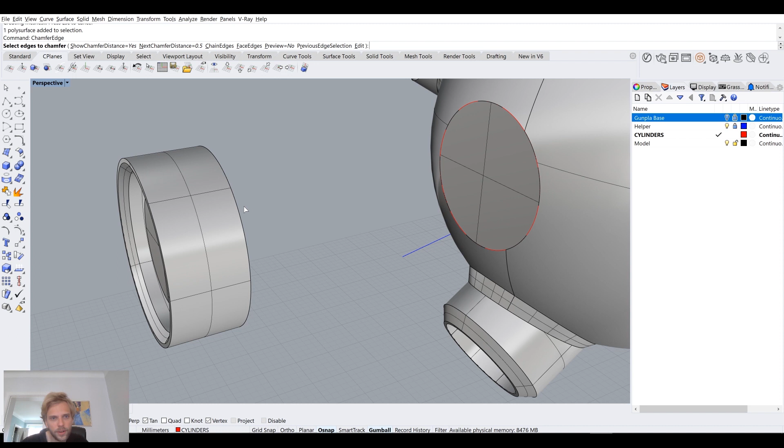Now let's first clean this up. I will join these guys up and type in cap, and now this is a kind of clean form. And as with everything, I will chamfer the edge of this form here in the back so that it fits better into the slot. And now we need to make the slot.

So we have this extrusion here. Let me isolate it. We have this extrusion which we will duplicate edge of. So we have these two edges, and I will offset both of those edges by 0.1 millimeters outwards, like that, to give it a little bit of tolerance. I will loft these two edges together.

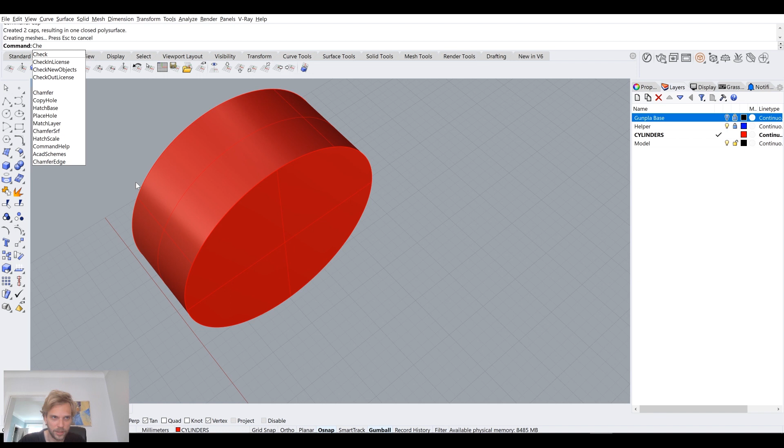I will cap to make it into a closed polysurface. And just like we did the chamfer with the eye itself, I will do the chamfer here. So chamfer edge, just like that. Okay.

So now we can show selected, like that, and we can Boolean difference out the cylinder from our shape. Okay, so we have that going on. Show selected again, show the eye, and move it back by -20 into the slot.

Let me create a clipping plane just to make - I always like to make sure, like double, triple sure that everything fits, and it seems to be fitting quite well.

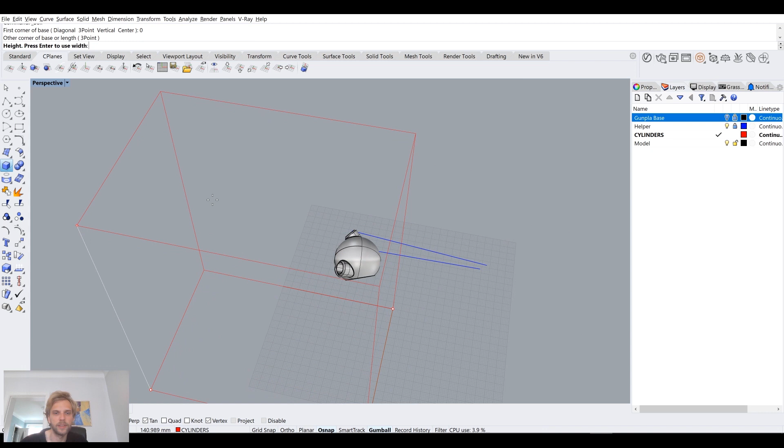Okay, so we have this guy separated, and now I can cut, isolate, I can cut the shape into 2 halves. So I will just create a box from 0, and make it pretty damn big, to make sure it intersects with half of the sphere. And since this is a symmetric model, the box, created at 0,0,0 coordinates, is going to be right in the middle, running through the middle of this form.

And I will use Boolean difference. Yeah, I will use - Boolean split. I will use Boolean split. Select surfaces to split - I will split this guy, enter. Select cutting surfaces, this box, enter. And then I can just delete this box. And now I have 2 halves of it.

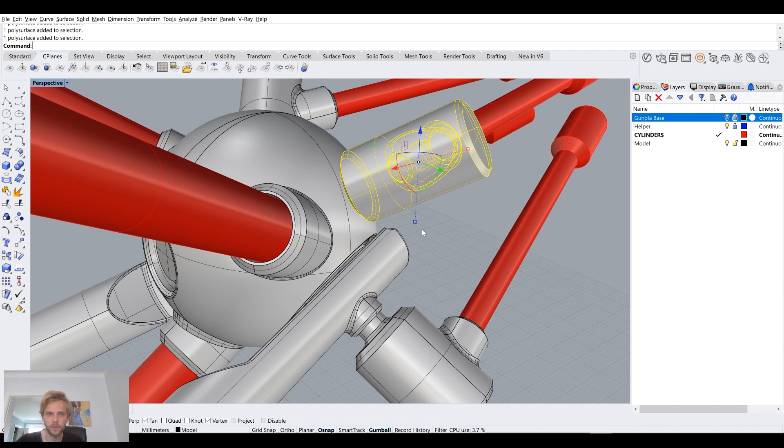So if I move it away, you can see how this whole thing comes together. Okay, let me show, we have everything here set up. Oh, so this one can be printed in place with the sphere. Should we do it? Should we use Boolean union on it?

We'll decide later. So now we have that. I'm just making sure that we don't have anything left.

So for the next video, I'm going to actually start 3D printing, and I'll take these forms and rotate them in the correct orientation to be 3D printable. And I will just print a really quick draft model to make sure that everything sits nicely. And we'll start the next video with that.